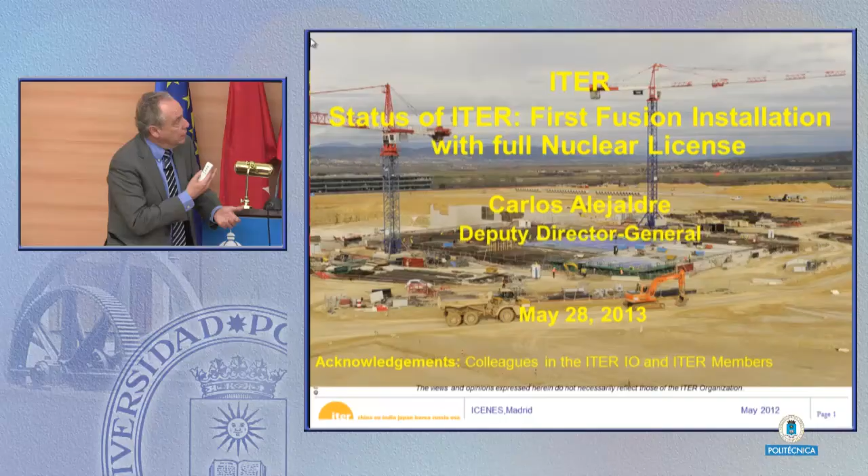And I want to thank certainly the organizers for this kind invitation to tell you about ITER, what is the situation with the project and so on. As you can imagine, for me it's a double pleasure. One, to be able to tell you the progress, and I hope at the end of the talk you realize that this project really is on its track to achieve all the goals that have been put, but also to be here.

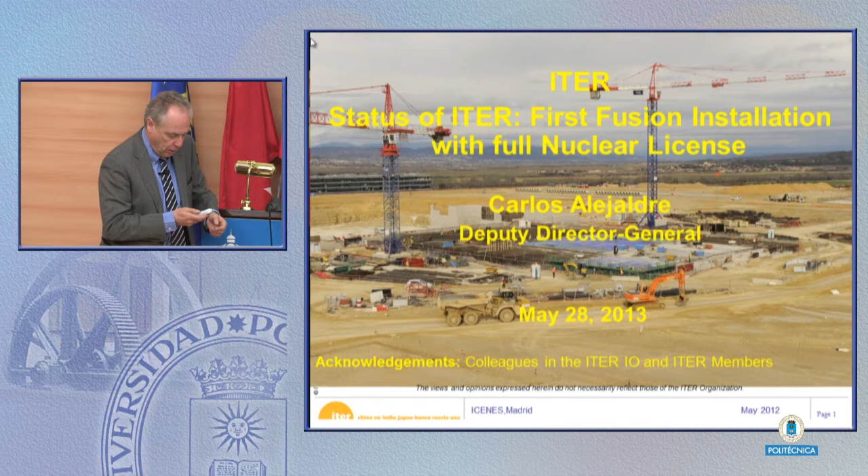You know, Madrid is my hometown where 2 out of my 3 daughters were born, so it's really for me a very good opportunity to be here. So let me tell you, let me see if I know how to control this.

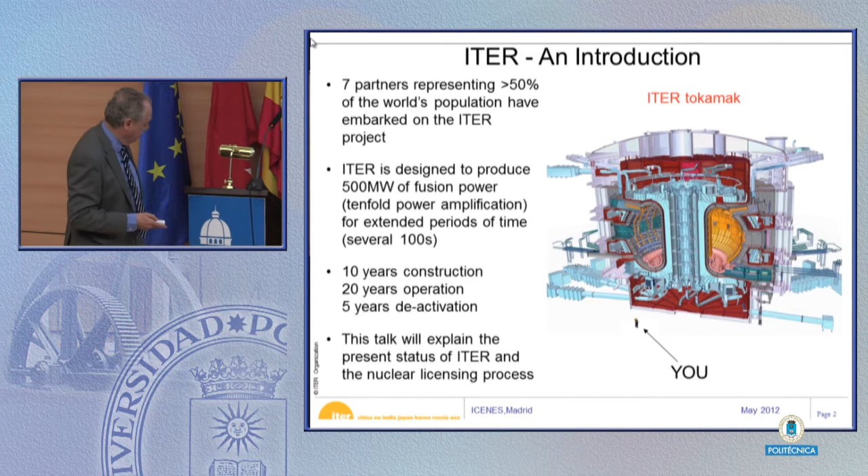Okay, so let me tell you first an introduction. I think all of you have heard of ITER, but as you can see, the main idea of ITER is to produce 500 megawatts of fusion power with a power amplification of 10. This has not been achieved so far in the magnetic fusion community. The record right now is with JET that achieved 16 megawatts out of the 23 megawatts that were needed to get the fusion reaction going. And ITER, in principle, is supposed to prove that it's possible to achieve this goal.

It will take 10 years of construction, maybe a little bit more, 20 years of operation and 5 years of deactivation. Note that we don't talk about decommissioning. This is a peculiarity of the project because the decommissioning will be the responsibility of the host state. In this case, it will be France.

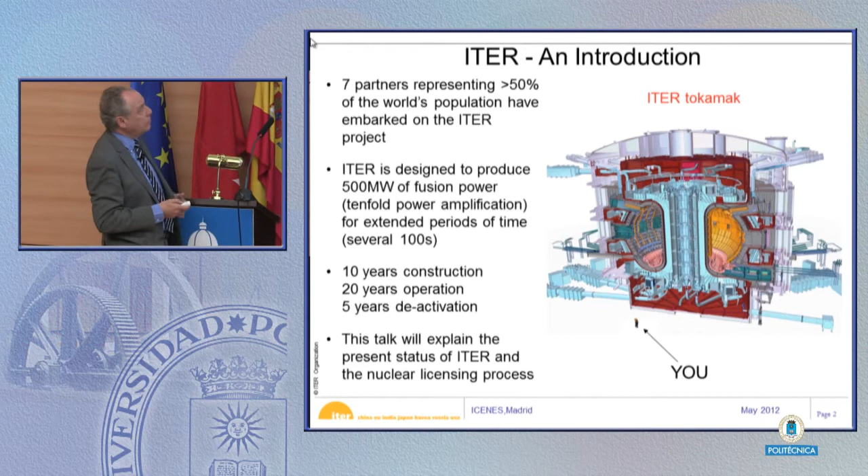So what I would like to do in the talk is to give you the situation with the ITER project, with the baseline, the design and construction progress, and talk a little bit about the nuclear safety and licensing, which is a big achievement of this project, and I think for the fusion community in general. Not only for the magnetic community, but in general for the nuclear fusion community.

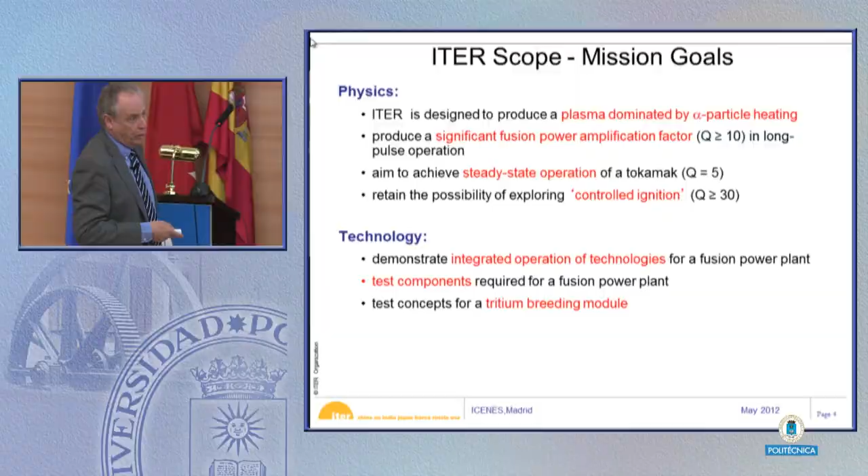ITER is designed to produce a plasma dominated by alpha particle heating, and this is a key element. Until now, all the machines in magnetic fusion have been dominated by external heating. This will be the first machine dominated by alpha particle heating. It should produce a significant fusion power amplification factor, a factor of 10 in long pulse operation, meaning more than 100 seconds, and aims to achieve steady state operation of a tokamak, pulses of thousands of seconds, with a Q, a gain factor, of about 5.

The possibility is retained in the second phase of operation of exploring controlled ignition with Q bigger than 30. This is from the point of view of physics, but in technology it is very key for the development of fusion, to demonstrate the integrated operation of most of the technologies that are relevant for a fusion power plant. We will test components that are required for this fusion power plant, and some concepts for the tritium breeding module, even though this is not going to be one of the big elements of ITER.

It's a huge project, I don't have to tell you that, and one of the good things is the collaboration aspect. In ITER, 50% of the population is represented in the project with the participation of the US, the European Union, Russia, China, India, Korea, Japan, and about 80% of the gross national product of the world is represented by these countries.

It's very peculiar because 90% of the components are going to be supplied in kind by the parties. This is a very good aspect of the project when you take into account the agreement to build the project. Governments like this in-kind contribution very much. From the point of view of management, this is not so easy. I have to tell you, experience has shown that it makes life a little bit more difficult. Interfaces are growing a lot between all the parties.

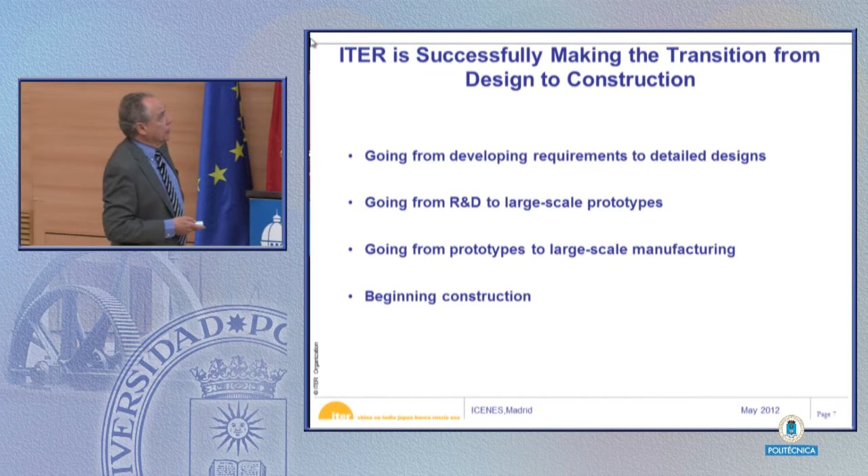That certainly is not the most efficient way to build a car, where every wheel is built by a different company, but certainly is very good from the point of view of collaboration and from the point of view of putting together all this effort between all these members. But this is a very peculiar thing in the management of the project. We are making this transition from design to construction. I hope to convince you about that.

The production is ongoing of most of the big components that are in the critical path of the project, particular conductors, the vacuum vessel and so on. I will tell you a little bit more of details about that. But the production is certainly ongoing.

So, as you know, ITER, this is a cross-section of the machine with the main parameters of the project. It's a huge project, so almost 1,000 cubic meters in the vacuum vessel, 830 cubic meters to be exact. The idea is to produce, as you know, a magnetic configuration with a D shape, which has been proven to be one of the most efficient in the community. It's very similar to JET, those of you that know this machine. And the main characteristics are given here in this transparency.

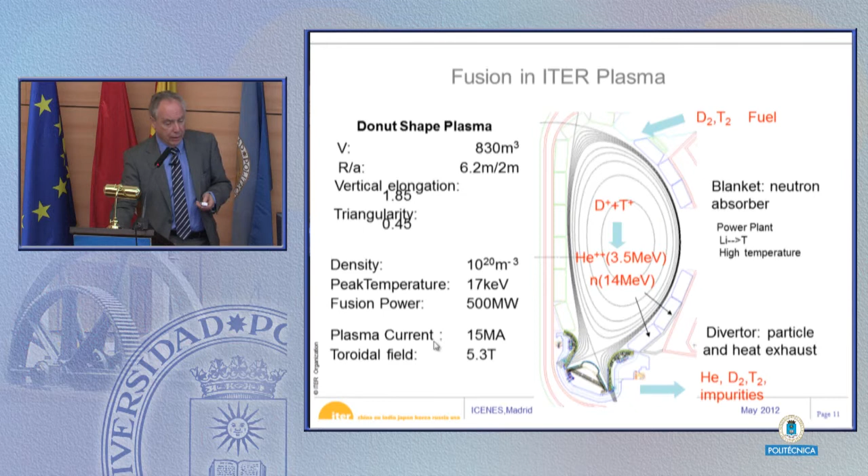The parameters that we are aiming are of these values, very low density, 10 to the 20, compared certainly with inertial densities. Peak temperatures 17 kiloelectronvolts, fusion power 500 megawatt. Plasma current will be, in principle, nominal 15 megaamp. I will tell you a little bit more. In the licensing process, we achieved that in principle we could go beyond 15 to 17 megaamp. And the toroidal field will be 5.3 Tesla.

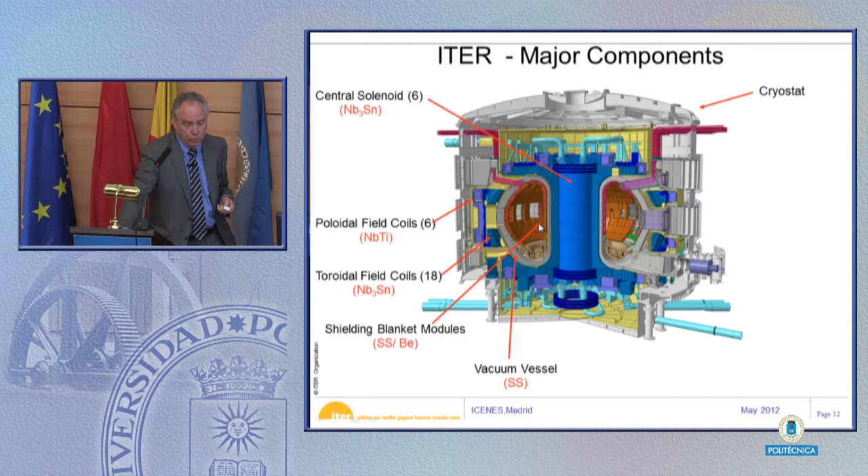So the main components that we have to construct are certainly all the magnetic configuration with the central solenoid, toroidal field coils, poloidal field coils. All of them superconducting, so we need to put them inside a big refrigerator, the cryostat. We need this vacuum vessel for the production of the fusion reaction, and it is also our first confinement barrier from a nuclear point of view. Then the blanket modules I mentioned to protect the superconducting coils and the rest of the machine.

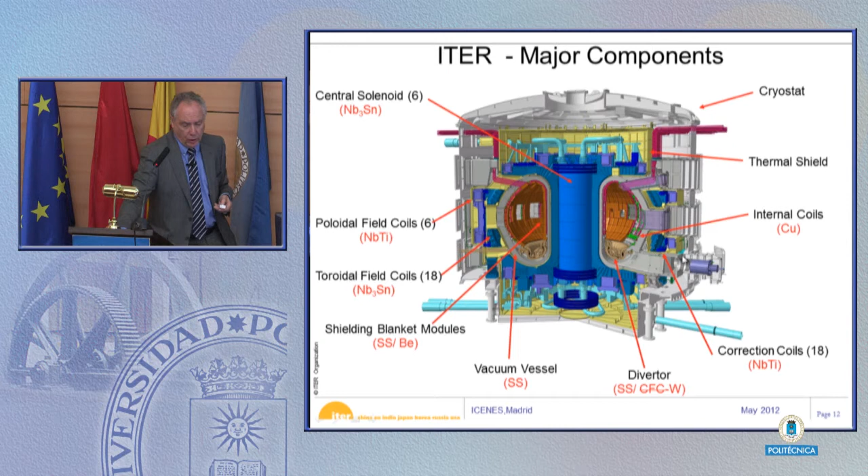The divertor, that is the key element for the extraction. Some internal coils to control the plasma further. These were introduced in the last design review that was done at the very beginning of the project in 2007. Thermal shield to protect the cryostat and so on, and some correction coils to take care of the difficulties we will certainly have during the construction.

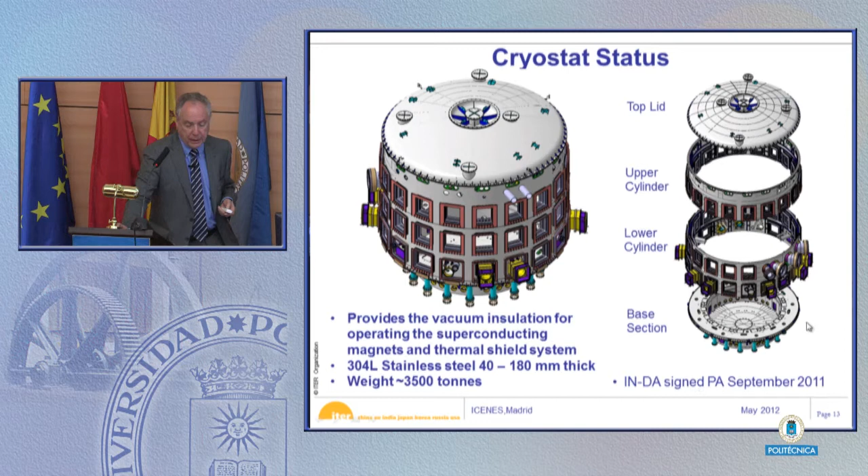The status of the main components of the machine you can see here. The cryostat is huge, maybe the biggest refrigerator built in the world right now. It's a stainless steel machine, 304L stainless steel, 3,500 tons, and this is being built by India. The procurement arrangement was signed in September 2011, and the signing of the contract with the company is already done. You can see the dimensions.

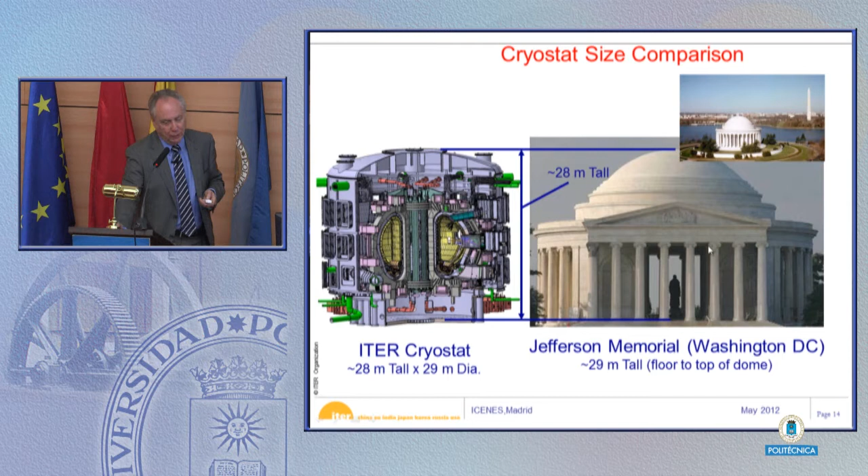Sometimes it's difficult to see the dimensions of the machine, but when you compare with the very well-known Jefferson Memorial, you see more or less it's the same size. So we could use this site for the cryostat, but I don't think it will be a very good idea, finally.

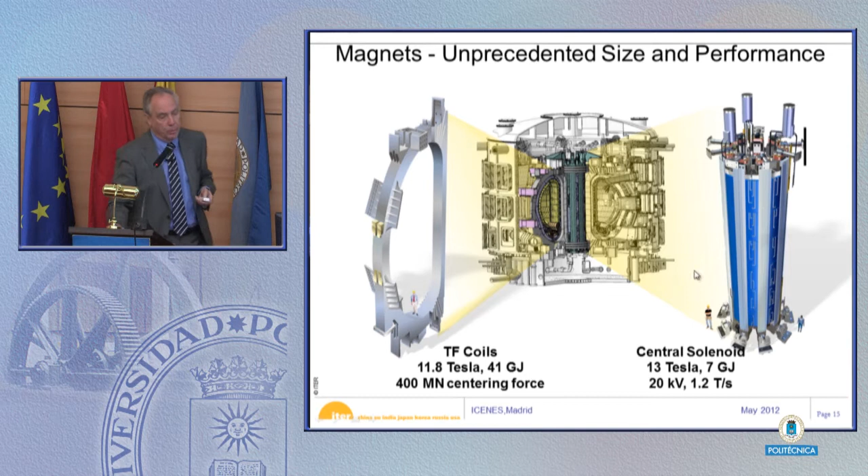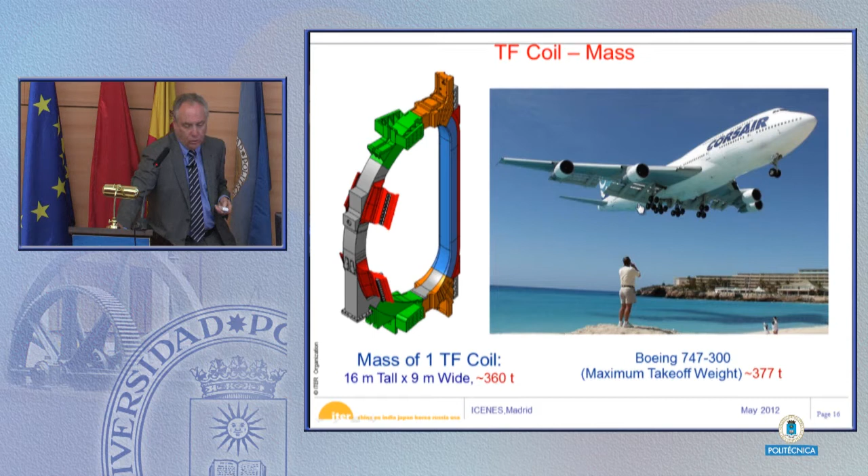The mass of this is really impressive. Only one of those coils more or less weighs the same as a Boeing 747 at full weight. And the production of the superconducting strand that you need in order to build these coils is also impressive. More or less now the whole niobium tin production in the world is dedicated to ITER.

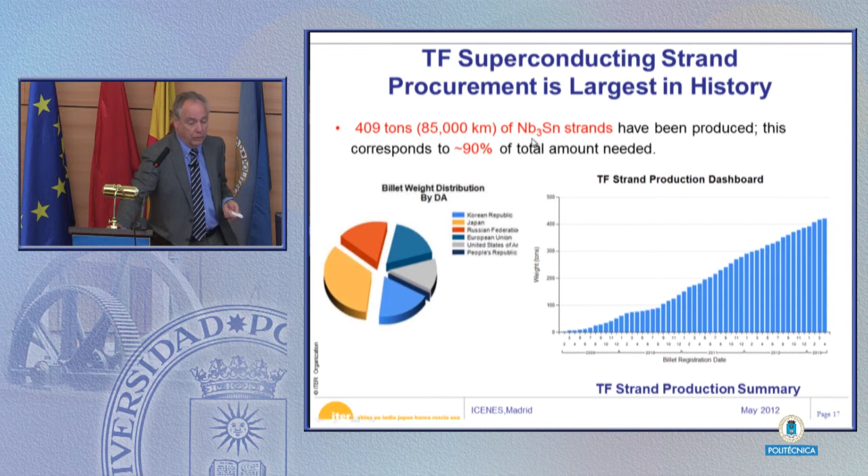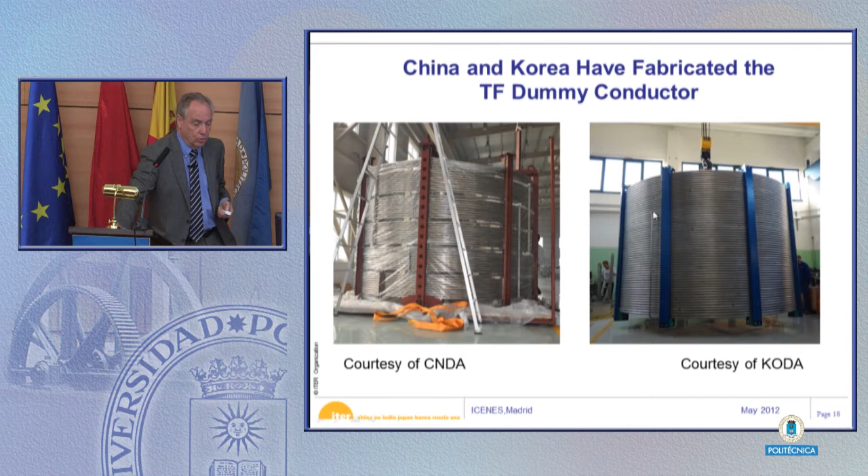And already 409 tons, which means 85,000 kilometers of these strands, have been produced, and this is about 90% of the total amount needed. So you can see that this is already very well on the way and finished. China and Korea have fabricated some dummy conductor to test the whole system. In Europe, also the production of the TF coil is going ahead with the different aspects in different places.

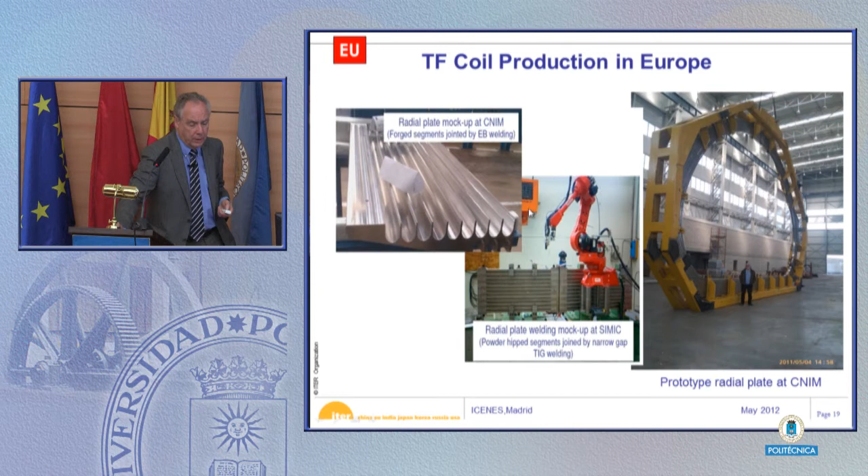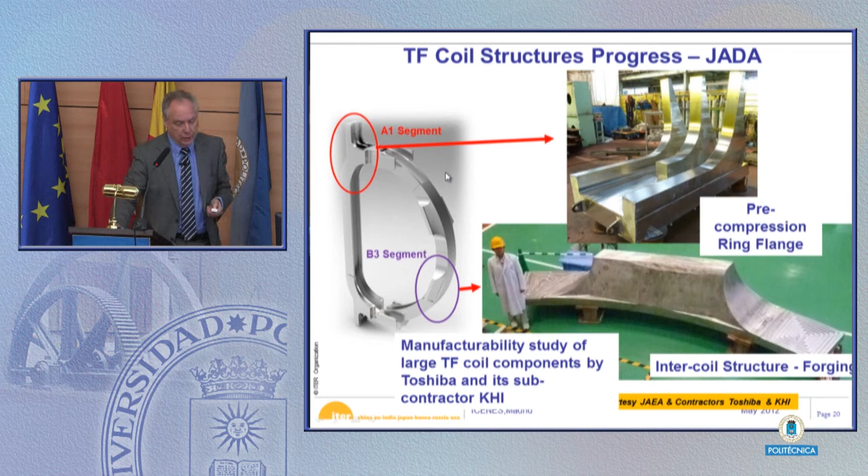Many countries are participating. Also in Japan, with several of the components related to the coils. 9 of these toroidal field coils will be built in Japan, 9 will be built in Europe. Actually 10, one will be the prototype that will be used as a spare. So this is the production, and you see all the countries that are related to that.

Another key element that is in the critical path of the project is the vacuum vessel. To call it vacuum vessel, when we discussed this with the nuclear fission people, they looked at this and they didn't think that this was exactly a vessel in the nuclear term. As you can see, it's more something with a lot of holes. But certainly this is a key element for the demonstration of the safety of ITER.

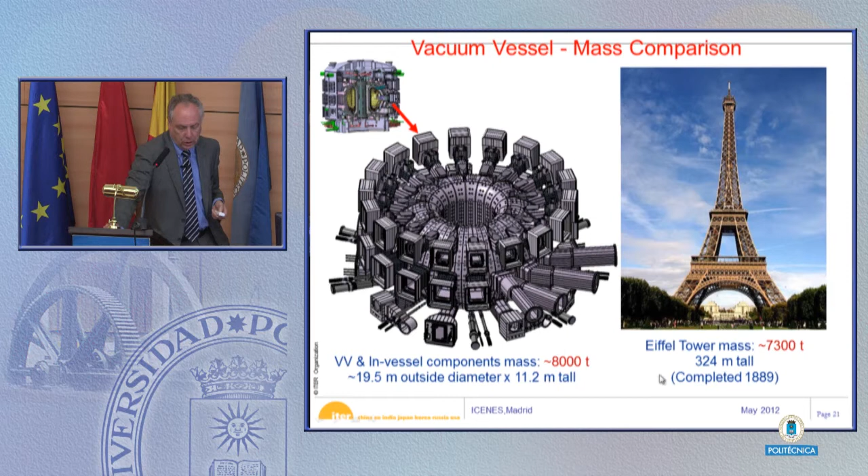It's an impressive vacuum vessel; with the in-vessel components it is 8,000 tons, heavier than the Eiffel Tower. You know, we are in France, so we have examples from there. This is a very peculiar element, and as I said, a very key element for the safety demonstration and for the good working of the machine. It's a double wall stainless steel machine. You have here the main parameters, almost 20 meters outer diameter, 5,300 tons, the vacuum vessel itself.

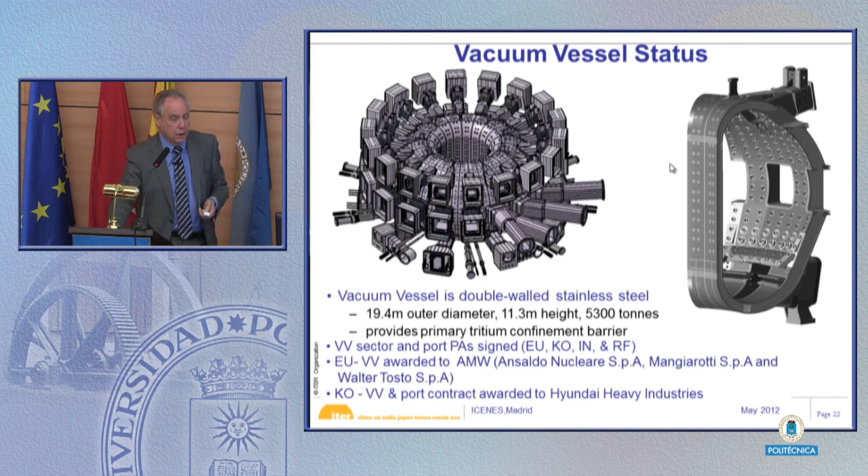The vacuum vessel is a typical example where you would not design a project where it's built by sectors. 2 of these sectors are being built in Korea, 7 of these sectors are being built in Europe, certainly with different companies and even in some cases with different technologies. So from a management point of view, it's not so easy, but the whole idea of this project is when it is finished, any of the members in principle can have all the information in order to build a future reactor, a demo, if they so wish.

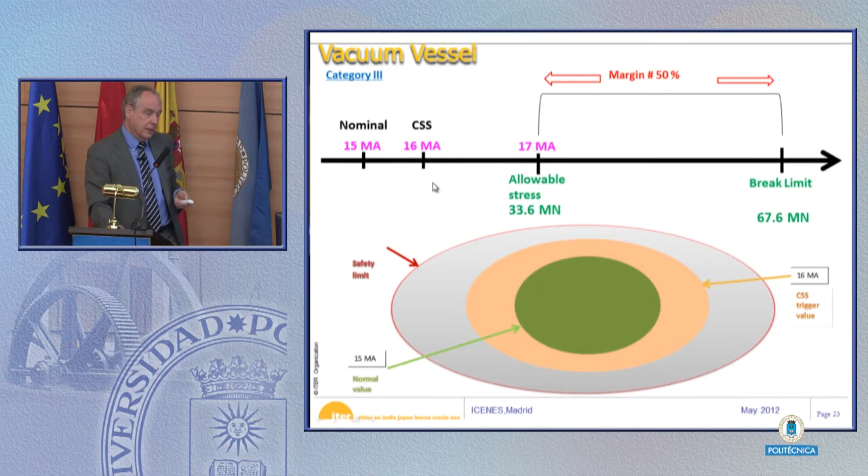But the vacuum vessel is the key element for the defense of safety in fusion, in magnetic fusion. And this is very peculiar because when you analyze a machine like ITER from the point of view of getting the license, the loads that the nuclear regulator is used to are not exactly the same. The main loads that we have in our vacuum vessel are the electromagnetic loads. And these electromagnetic loads are not known to the level that is typical in the nuclear fission industry. So it means that we have to build a lot of margins in order to take care of these uncertainties that we may have.

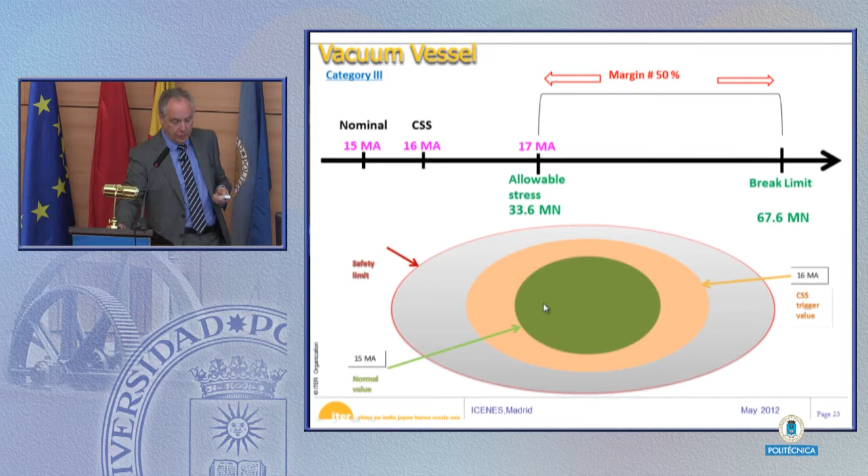So you can see here a kind of representation of our margins. We define a hard core, where all the safety demonstration is given, and that implies the maximum current in the plasma of 15 megaamp. But we have considered the possibility to go up to 17 megaamp, and even going beyond 17 megaamp, we have built a margin of 50% to cover forces of almost 70 meganewtons before reaching the break limit of the machine. That is totally needed in order to be able to license a machine like ITER.

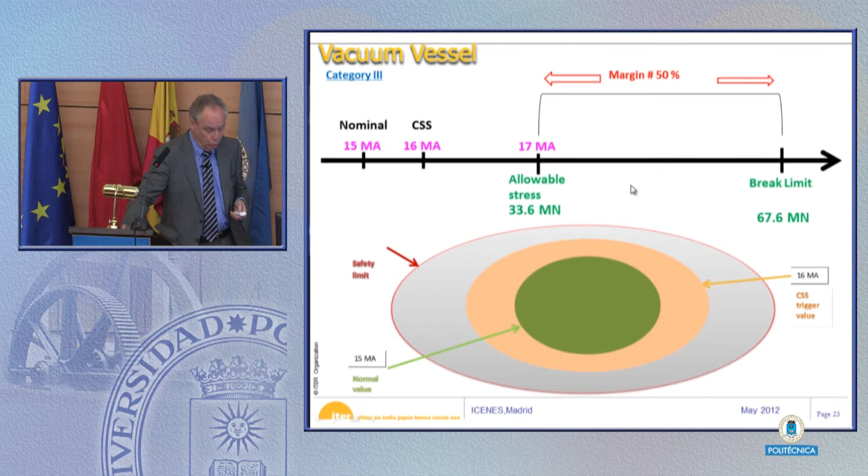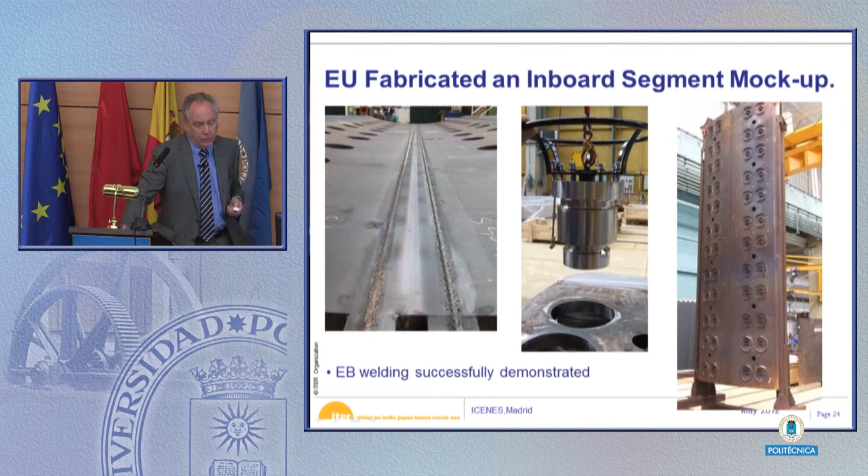The construction is going on right now. In Europe, this is a mock-up of one part to show the electron beam welding, the success of that, and also in Korea, as I mentioned, where they are more advanced in the construction of the vacuum vessel and also of the thermal shield.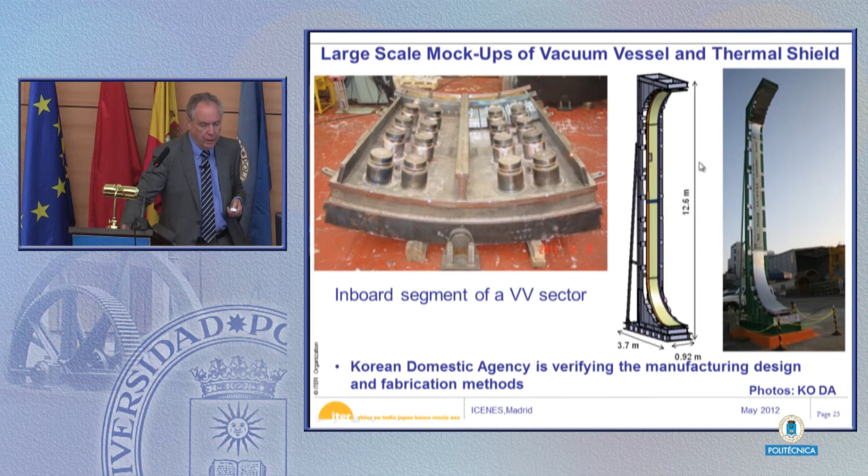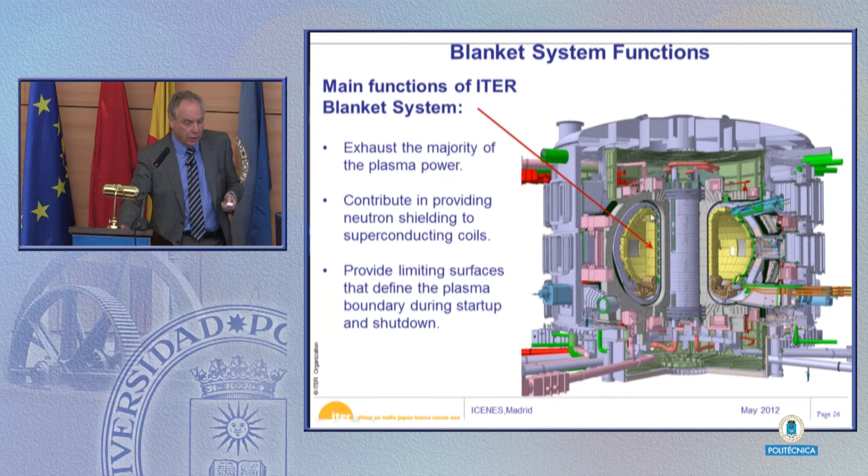A key element also for the protection of the whole system, people and the machine itself, is the blanket. One of the big reasons is to provide the neutron shielding of the superconducting coil. Also extracting the heat from the machine is done through the blanket. But as I said, in ITER there will not be production of tritium, only very small amounts in test blanket modules. We have 440 blanket modules. This is where the interaction of the plasma with the first wall is concentrated, which will be made of beryllium and tungsten.

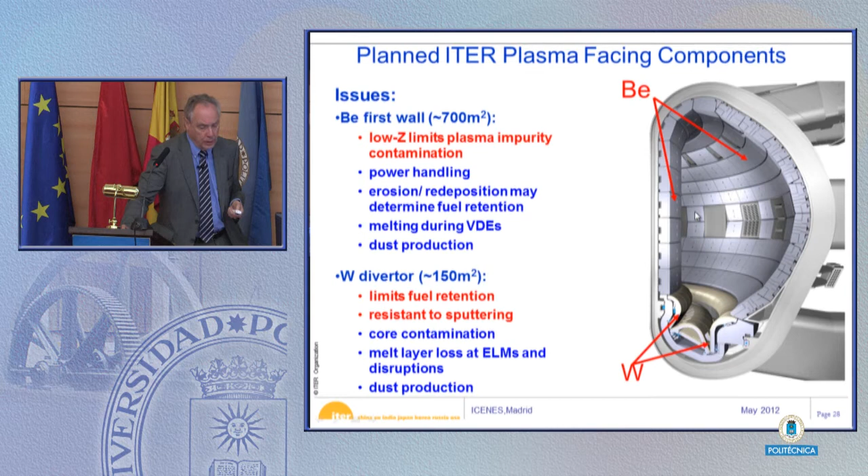The divertor finally will be, well, it's not been decided yet, but it's very likely that it will be only a tungsten divertor, and the wall will be a beryllium wall. This is being tested also in the environment of JET with exactly the same components for the first wall, which have very good plasma wall interaction properties.

The main concentration of heat and particle flux will be in the divertor that, as I mentioned, will most likely be only a tungsten divertor. One of the main reasons also has to do with safety and with the licensing process, because initially it was considered the possibility to have a carbon divertor, much better known in the tokamak community. But the problem with carbon is that it absorbs tritium very well, and it's not so easy to desorb the tritium.

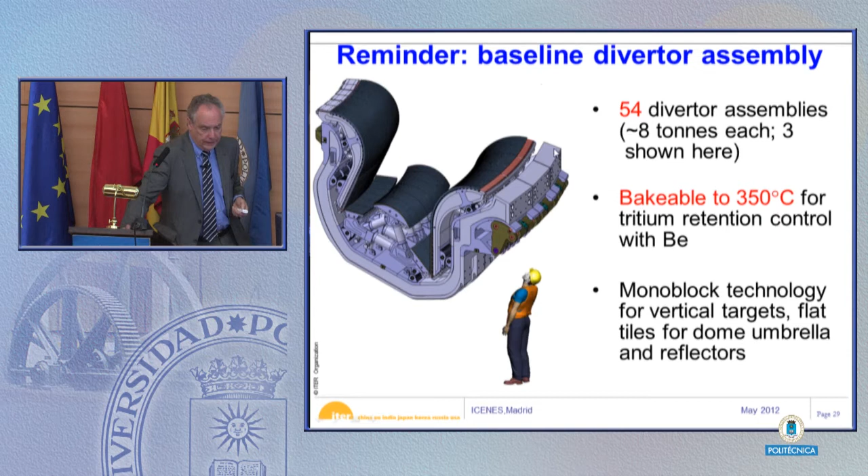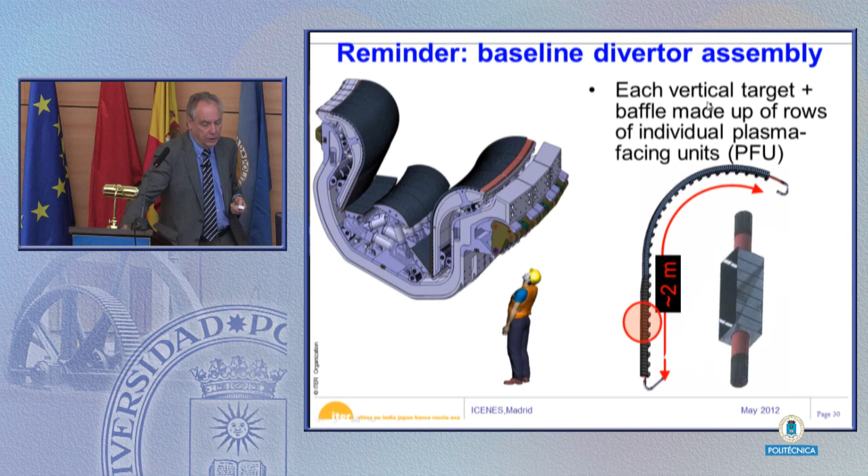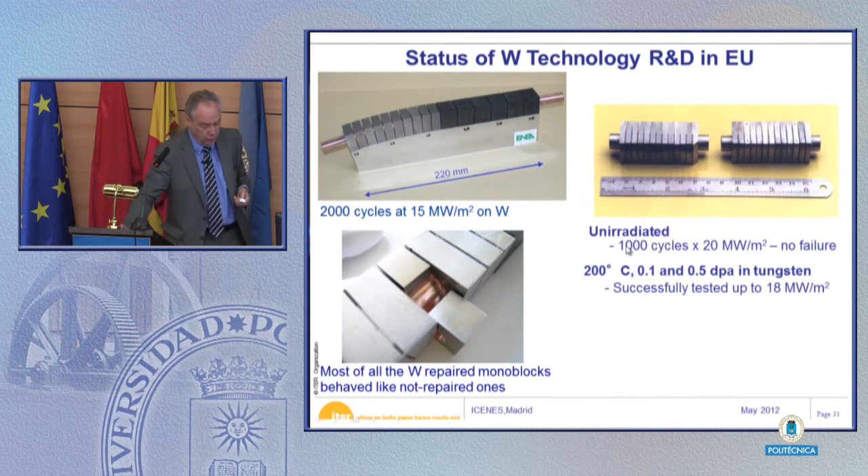So with tungsten, we have the possibility to have it bakeable at 350 degrees, and the possibility to degas the tritium, which makes the whole safety issue much easier. Each of these vertical targets is made of rows of individual plasma facing units, all of them cooled. They have been tested in Europe and also in Japan to values which exceed the requirements, with 20 megawatts per square meter in 1,000 cycles, as you can see here. So the technology is actually there.

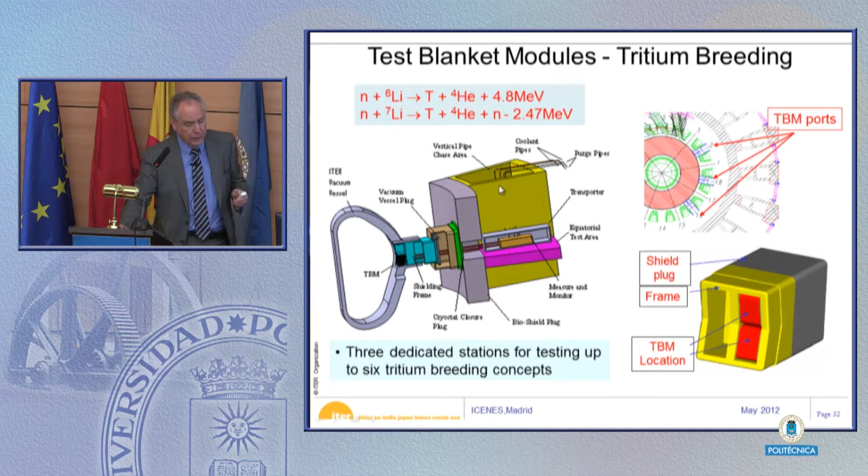I mentioned that there will be a few test blanket modules to test the idea of how to produce tritium using the neutrons that are going to be produced in ITER, but this will be only very, very limited.

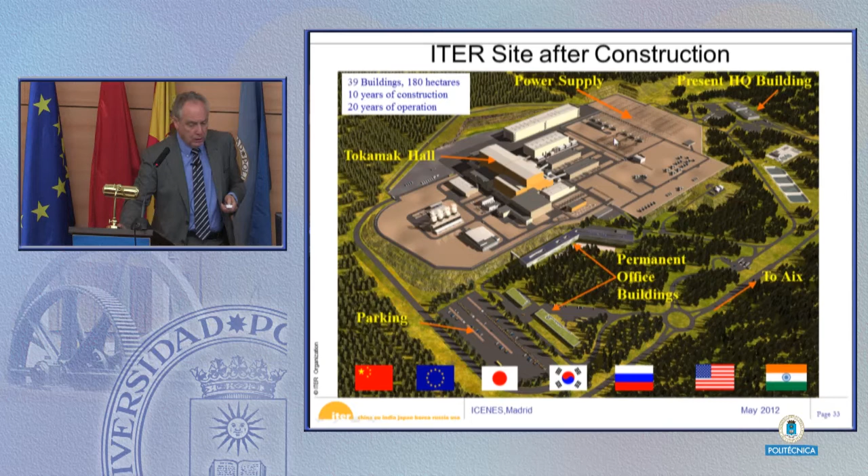The ITER site, after it is constructed, should look something like that. This is a huge site, 1.4 kilometers long, about 1 kilometer wide. I invite you to come. It's really impressive when you see it. And the construction is going on right now at a very good pace. The headquarters was inaugurated in January of this year.

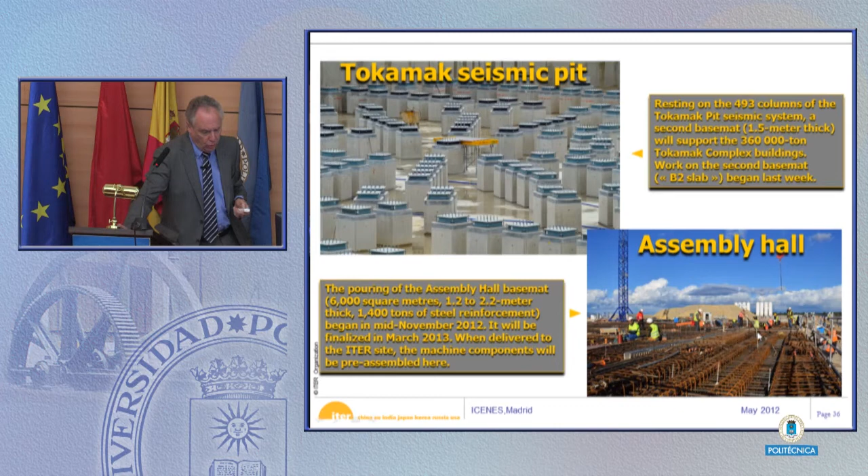We are in a place where the seismicity is relatively moderate, but enough to have a system of protection where the whole machine is going to be on 493 columns that will give the seismic isolation of the whole machine. You can see here the work that is going on in the assembly hall. They're putting the concrete already in the assembly hall.

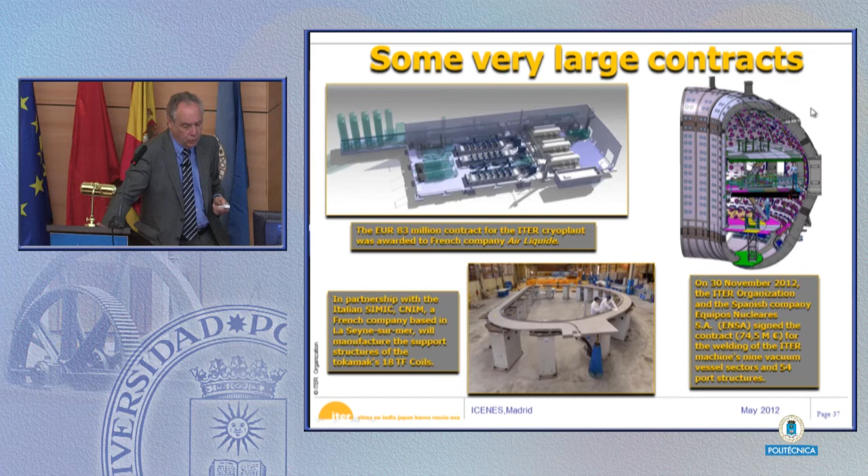And very large contracts are already being given, like the cryo plant that we are going to produce. I think it's going to be the second biggest in the world after the CERN one. There is also a big contract with a Spanish company, ENSA, for the welding of the vacuum vessel, which will be, as I mentioned, a very key element. Here you have also some of the structures of the TF coils that have been constructed not so far.

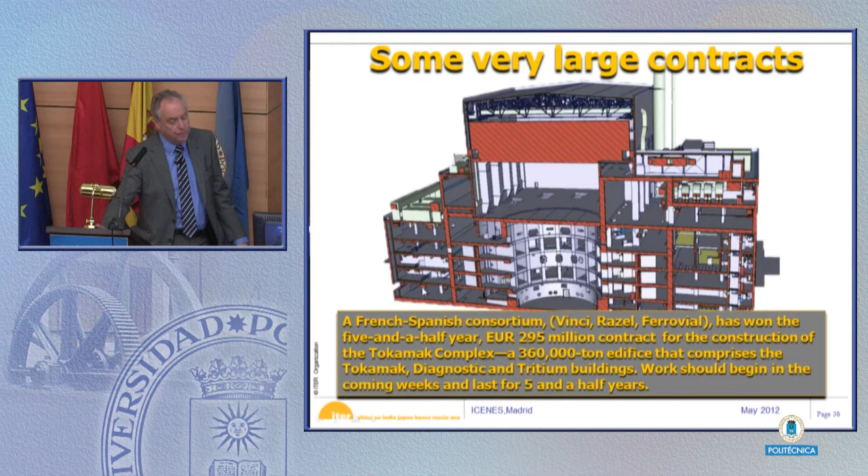The construction of the big building was given to a consortium that started the work only a few weeks ago. And this is a very, very key element. This is the second confinement barrier, so from a nuclear point of view, it is also one of the key elements. And that takes me to the nuclear licensing.

For those of us that work in the fusion community, this is something that normally is not even thought about. You say, no, fusion is safe, it's inherently safe. Okay, very good, yes. But now prove it. It was never proven before. It was always the fusion community that made the analysis and said that this proof had to be done. And even the fact that ITER was considered a nuclear installation, sometimes people thought, why do you need something like that?

But the fact is that we have a tritium inventory, a radioactive inventory, which is very significant. To give you an idea, in France, if you are beyond 27 grams of tritium, you are considered a basic nuclear installation. Basic nuclear installation is a big name that includes nuclear power plants or something like ITER. Because in ITER we have in the order of 4 kilograms. So 4 kilograms, as you can see, is orders of magnitude bigger than the limit to be considered a nuclear installation.

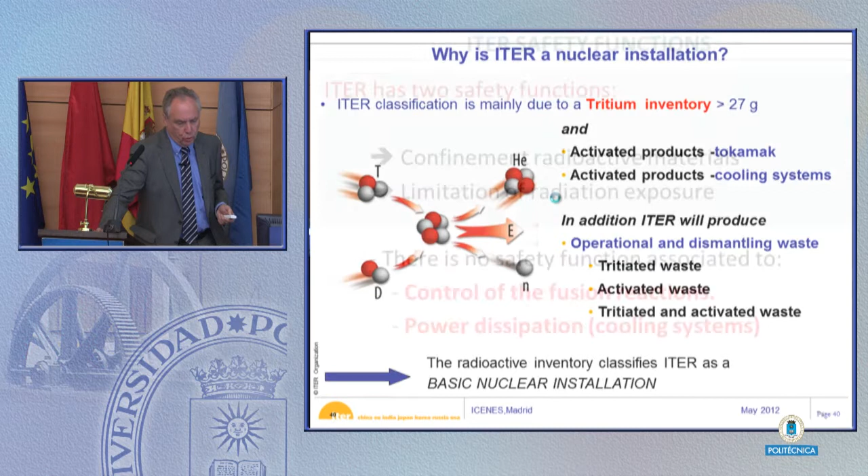But the very good thing, I think this is a lesson that, in my view, is one of the key elements for the future of fusion. The very good thing is that we have been able to prove, and it has been accepted by the Nuclear Safety Authority, that there is no safety function associated to the control of the fusion reactions. And this is a key element.

Because when you go into a nuclear licensing process, if you have to demonstrate that your safety depends on the behavior of the plasma, then you do have a problem. I can tell you, you do have a problem, because there are still a lot of unknowns in the knowledge and in the control of this fusion reaction. To give you an example, disruptions do exist in the tokamak, and we know that they are going to happen.

And the second thing, there is no safety function associated to the power dissipation, the cooling systems. Your cooling system can fail, and still there is no safety issue associated to ITER. And I think that these two functions, for the future, should be maintained like that. Otherwise, it will be much more difficult to control and to license any fusion machine in the world.

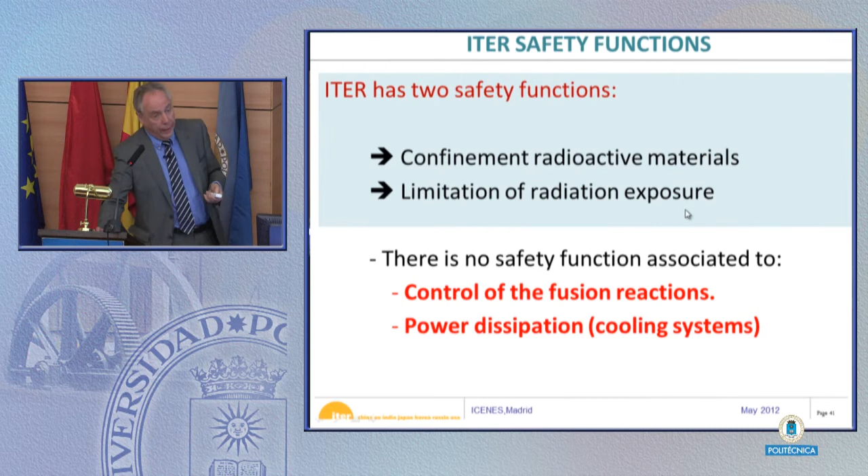The two safety functions that we have are the confinement of the radioactive materials that do exist, and the limitation of the radiation exposure to people and to the environment. In order to prove that, we had to go through a full safety analysis, analyzing all the internal and external risks that we had. Many of them very traditional, like fire, explosion, internal explosion. We are using hydrogen. The hydrogen may explode. We have a lot of dust in the interior of the vacuum vessel, so the dust may also explode.

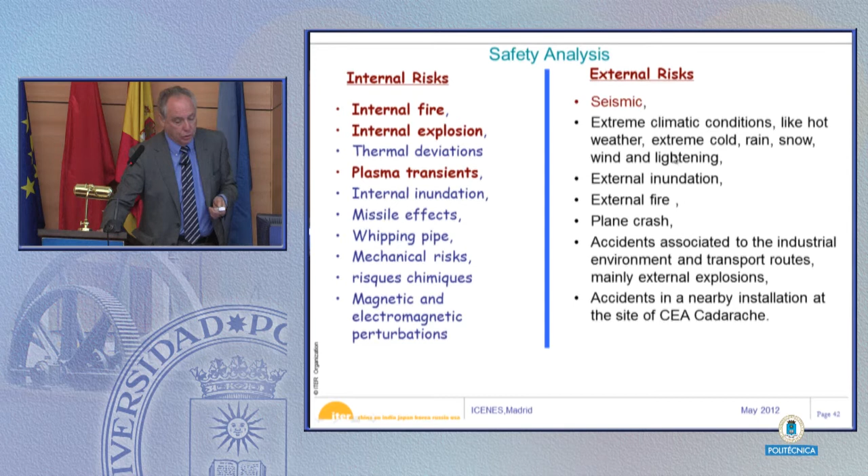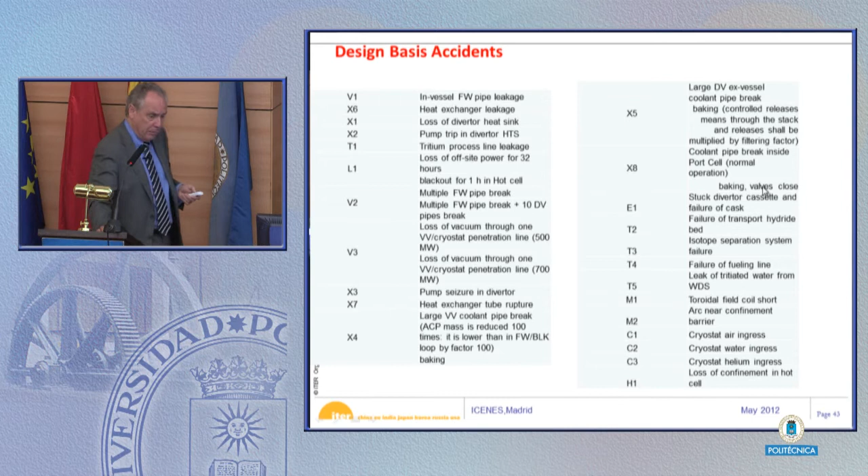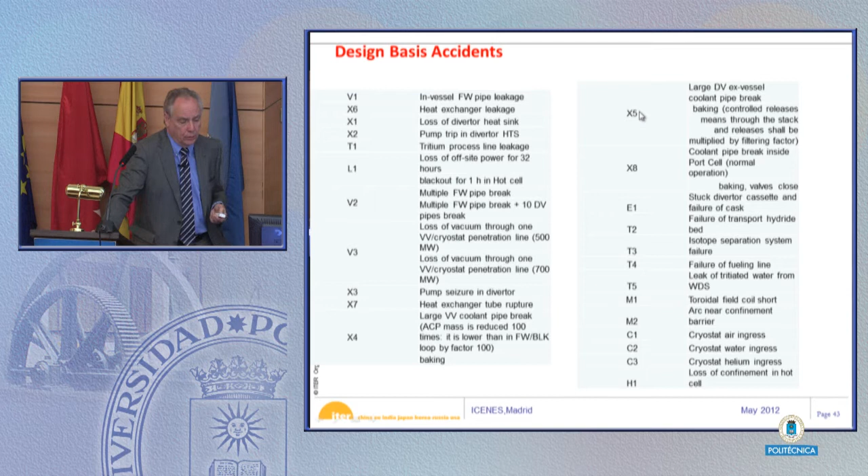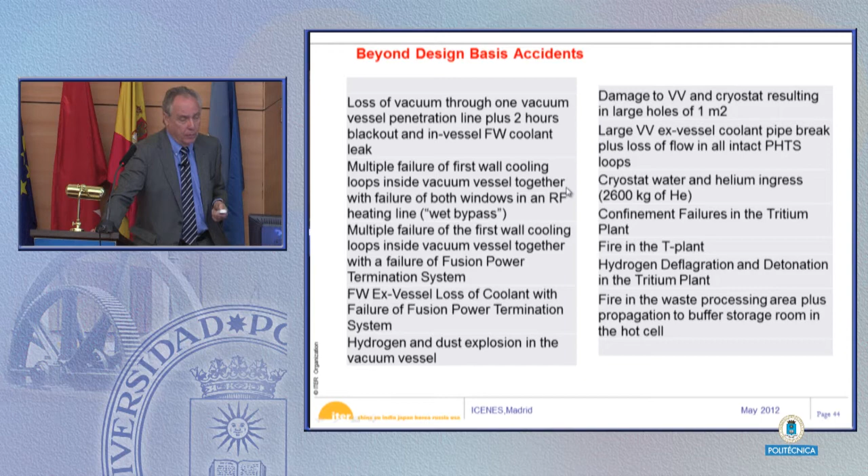Thermal deviation, plasma transients, or the magnetic and electromagnetic perturbations, and also external risks that could happen, seismic, extreme climatic conditions, fire, plane crash and so on. So we had to go through a full list of design basis accidents. As it was mentioned in the talk yesterday by Professor Rubbia, this was not done in a probabilistic way. It cannot be done because there is no experience on fusion, so it must be deterministic, and we went through a full analysis of design basis and beyond design basis accidents, or combinations of accidents without any interaction between them, to test the limits of the machine.

And that was done in a very thorough analysis by the Nuclear Safety Authority in France, which I think can be said to be one of, if not the most strict nuclear safety regulator in the world, through a very difficult process that took more than 2 years. Actually, it took a little bit longer because we started before that, with a process that involves the public, where the public had the opportunity to check all the safety files that existed in ITER, give their advice, their complaints, their recommendations, and a thorough technical analysis with the technical body of the French nuclear regulator, called IRSN, the Nuclear Safety Radio Protection Institute, with meetings almost every week that analyzed the whole machine, all the conventional and non-conventional aspects of the machine.

And again, those of you that were in the talk about the emerging systems by Professor Rubbia, he did mention that one of the key challenges of DT fusion will be how to handle the tritium and how to prove that to the regulator and to get the license. Okay, so we can say that problem is solved. We already did it. For the very first time for the fusion community in nuclear history, this has been done.

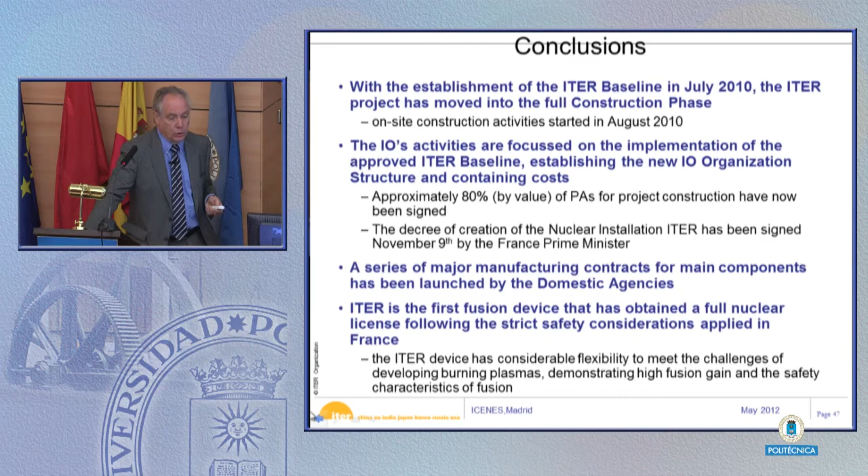So with that positive feeling, I want to conclude. I hope to convince you that ITER is now very well on its way, with a lot of difficulties. I don't want to hide that there are a lot of difficulties. We do have difficulties with the schedule of the machine right now, also with the cost. The cost has increased since it was originally designed, but it is very well underway, and I think we have the flexibility to meet all the challenges that this project is going to have.